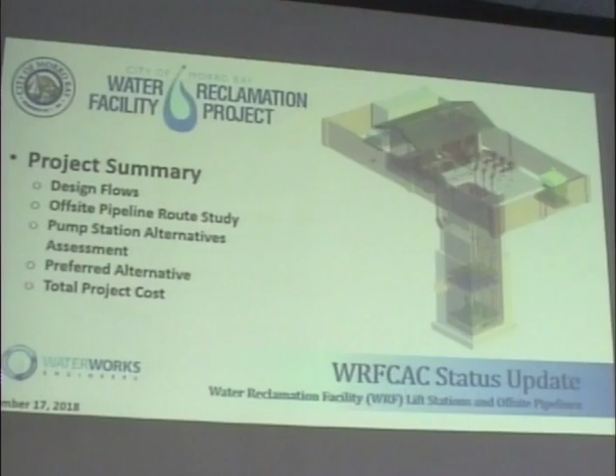So the city's been working with Waterworks Engineers since November of 2017 as the designer for the lift stations and pipelines that will be used to connect the existing wastewater treatment plant to the new water reclamation facility out at South Bay Boulevard. The draft conceptual design report is Waterworks' first major deliverable, and we'll have subsequent design documents, the 60, 90, and 100% phases, to bring to WRF-CAC and to council as well.

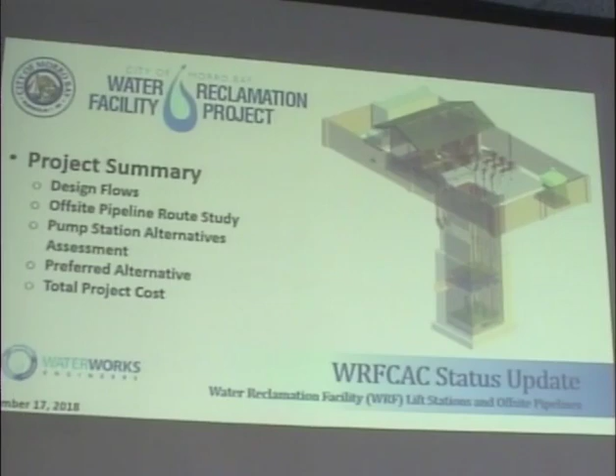So the concept design report is really doing a couple of main things for this component of the WRF program. One is to look at the different alignments and different ways that we can run pipes between the existing facility and the new site. The other thing that's critical is looking at the pumping and the orientation and the number of lift stations that we potentially use in order to convey that wastewater from the existing site up to the new site. And then the third thing is really to identify exactly where those pump stations would be located.

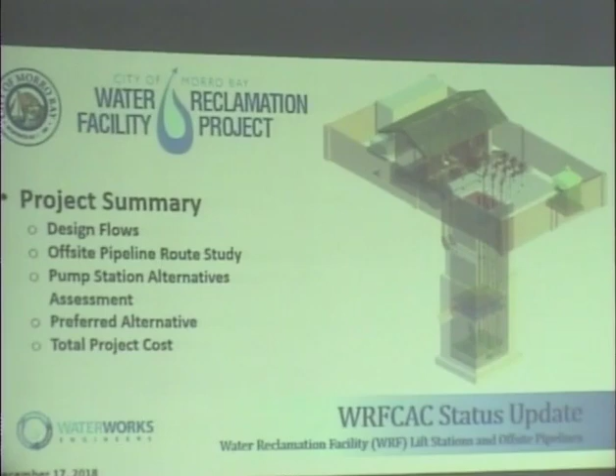So we have with us tonight several engineers from Waterworks Engineers, and Mike Fisher is going to be giving a presentation that's going to go over these different topics. So I'll pass it to Mike. Thank you, Eric. Thank you, members, for the opportunity to present.

We've been working on this project for approximately 12 months, and through that time frame, we've developed a wide range of alternatives, and the reason for that was to make sure that we've taken into account the various constraints, both cost and non-cost, related to the potential options for the pipeline alignment as well as the pumping options. And we wanted to bring this to you at this phase so that any comments, concerns, questions that you have from the preliminary assessment get properly depicted in the final version of the concept design report. That was the reason for bringing a preliminary findings assessment first, rather than the concept design report, to be able to have some interaction with individuals regarding the results.

We're going to hit on the design flows that were used. We're going to hit on the route study for the pipeline alternatives, as well as the pump station alternatives throughout the presentation. And subsequent to that, we'll look at what the preferred alternative is as we see it now, taking into account all those comparable constraints and cost related items. And then we look at what the current total project cost is going to be. And so the first item you'll see in the presentation is kind of a 4-panel overview of the entire process.

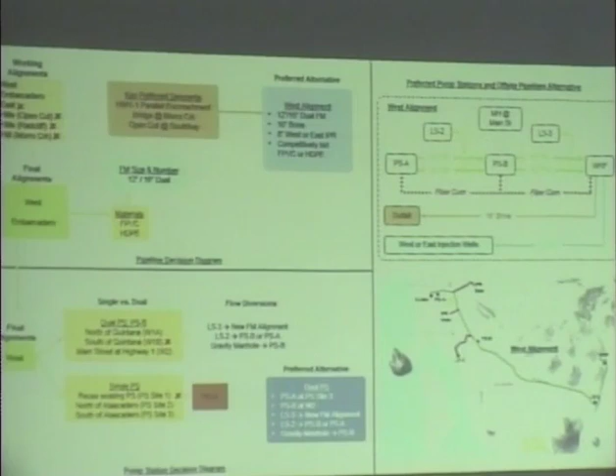And in the upper left corner, you'll see a representation of the pipeline decision diagram, basically a process by which we looked at working alignments and then fatal flawed certain alignments due to cost and non-cost constraints, and then took those final alignments, which happened to be the West and Embarcadero, and I will go through how we got to that point. And we took those 2 final alignments into the pump station analysis. And I'll explain throughout this presentation why we got to that point with various slides.

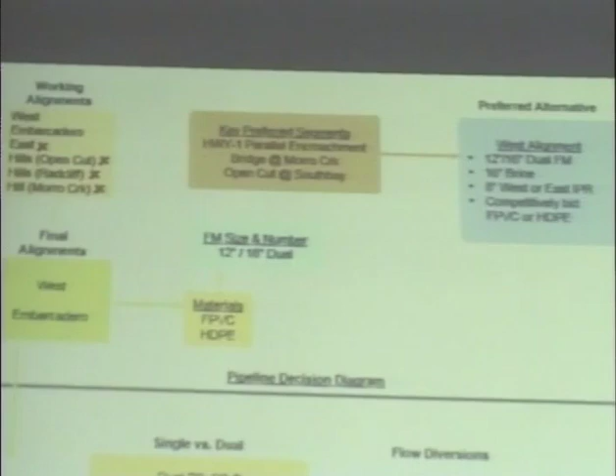But we wanted to give you this as an overview of the process so that, as we go through the presentation, if you want to look back at the flow chart of decision matrices that we went through, you can jump back to that. But at the top left there, you'll see the working alignments, and an analysis of those led to the final alignments, which were then taken through a process to identify some key preferred segments that we had to make sure we addressed, and we resulted in a preferred alternative.

Whereas on the pump station side, once we took the West and Embarcadero alignment, we looked at 2 different alternatives: a single pump station that took all of the flow all the way from the current wastewater facility up to the new WRF location, as well as a dual option. And I'll get into why a dual option does provide some benefits.

And then on the right-hand side of this flow chart, for you to have available to refer back to as we go through the presentation, is the process mechanical diagram of the preferred alternative on the upper right. And in the bottom right, you'll see the preferred alignment as it stands with us at this point in the process.

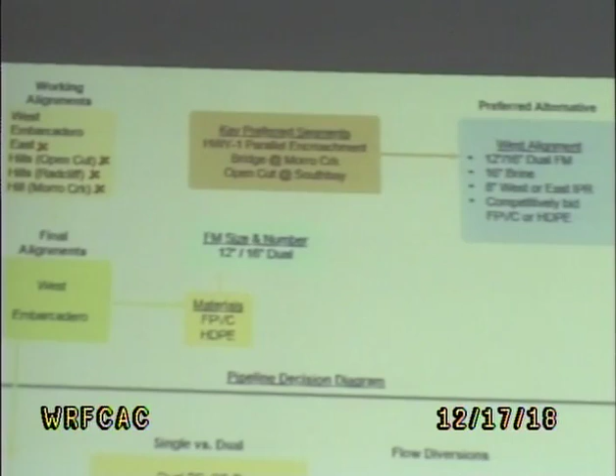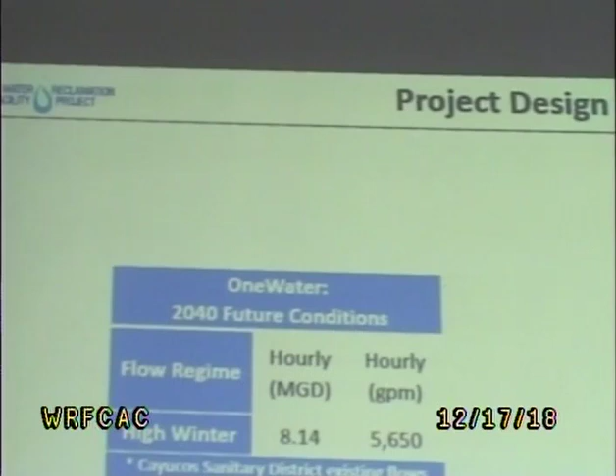The way that we went through this process was we first looked at the rough design constraints, and the 2 biggest items were what's the design flow for the pump station, and secondarily what we'll call total pumping hydraulics. And those 2 design conditions affect the leading alignment alternatives and pump analysis.

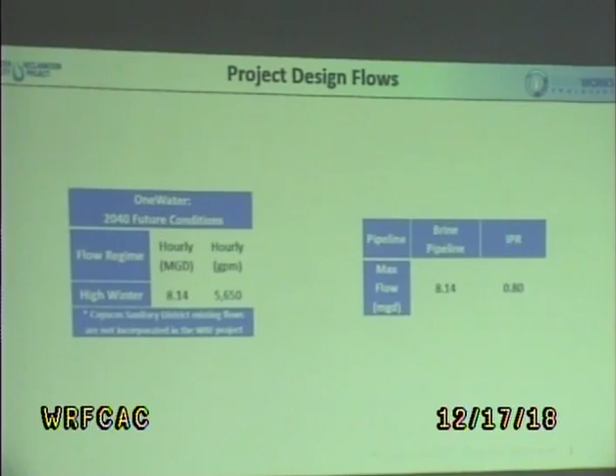So we just wanted to make sure it was understood that the city has been going through a really advanced process by developing their One Water master planning process, and we integrated considerably with Carollo during that process to make sure that we were bringing to you a design that matched with their build-out conditions.

And so you'll see that the pump station is built with a firm capacity of 8.14 million gallons on an hourly peaking basis, and then the brine line to bring flow back from the WRF in the wet conditions when you may not be able to use the indirect potable reuse facilities. You bring brine back down that line.

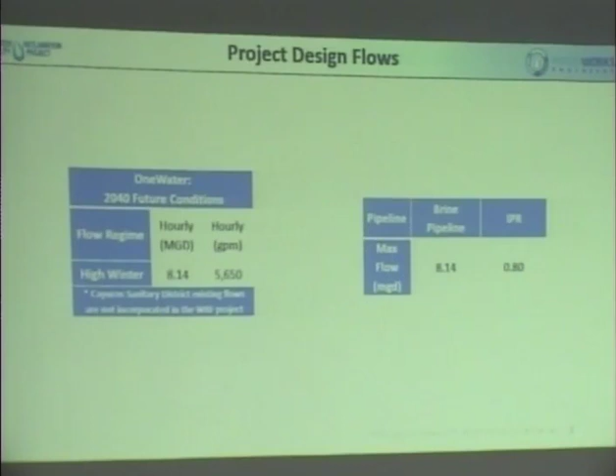And what that results in is basically 4 different facility types that we are building or looking at in our alternatives alignment. The key one being the force main that takes water up the hill. Then we've got the brine line that brings the treated water down the hill for ocean discharge. We've got the indirect potable reuse line, which is intended to go to the recharge facilities. And then we also have a communications conduit. So when we were looking at alignment alternatives, we were looking at space available for all of those pipes.

One of the things you'll notice is in the sewer force mains, I talked about 2 major constraints that led to the initial assessment. One was, what is the flow? And that leads into hydraulics. And one of the things we saw was, given the range of flow, that 8.14 million gallons on the previous slide represented the max hourly pumping conditions that the treatment system produces. That condition only happens a very small amount of time. Most of the time when you're operating this plant, it's under 1 million gallons, and in the middle of the night, it's as low as 0.3 million gallons per day.

Because of that, we believe that a dual force main option provides the best hydraulic conditions, meaning that we don't want to allow low velocities at very low flows in a large diameter single pipeline; that can significantly affect operations. And so we looked at a dual pumps, dual force main condition: a 12-inch force main for typical operations, a 16-inch force main as flows increase, and then at the maximum capacity conditions, you'd run both force mains simultaneously.

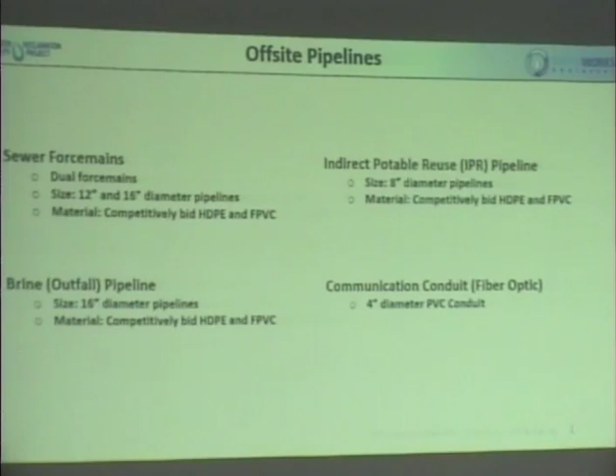And that's why we looked at the dual force main option, and that's what you'll see as we move forward. The offsite pipeline route study, kind of an overview of how we produced this process. We developed working alignments, and our working alignments included not only the ones that had previously been discussed, but we also, as you'll see in the next couple of slides, looked at a wider range of alignments, thinking that we might be able to find one that was outside of what had been discussed previously, making every attempt to identify an option that minimizes the non-cost impacts associated with this project, as well as trying to stay within the available cost matrix of the project.

So what we did is we took that wide range of working alignments, we identified the major criteria and constraints associated with those, and then certain alignments were fatal flawed based on those major constraints. I'm going to walk you through each of those, but I want to give you how the process worked. Once certain alignments were fatal flawed, we took the final alignments, which are the West and Embarcadero alignments, through a detailed cost assessment and a non-cost considerations assessment. I've got a table in a few slides where I can walk you through each of those constraints. From that we ended up with the preferred alignment alternative.

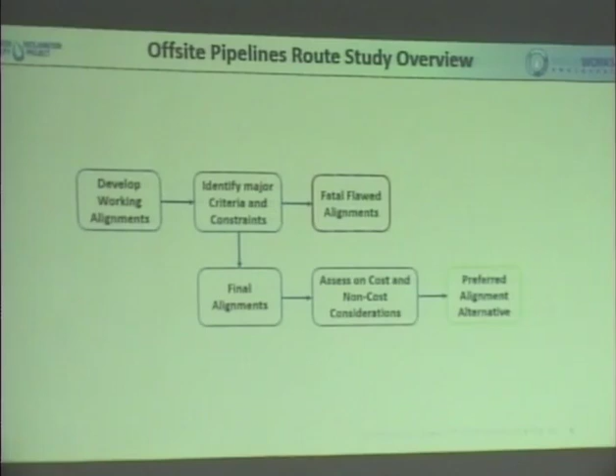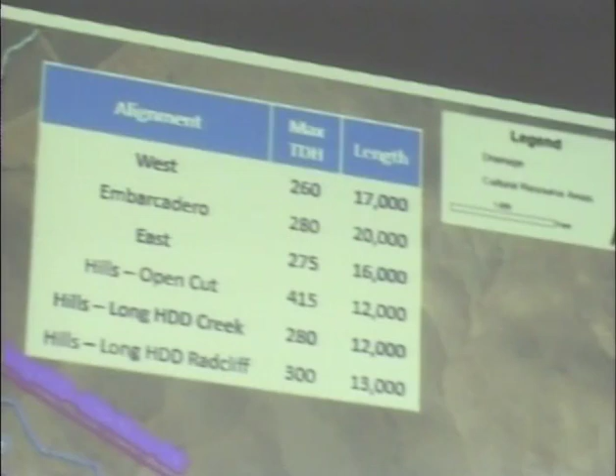So this figure represents the wide range of alternatives that we looked at for the project. You'll see we have the original west alignment that was discussed, which is along the bike path, east along Atascadero, along the bike path until you get onto Quintana Road, up Quintana Road. This is one variation from what you may have seen in the past: instead of crossing with trenchless construction across Highway 1, we drop all the way down onto South Bay Boulevard and have looked with Caltrans at going under the South Bay Boulevard Bridge so that we don't need to do a high-cost trenchless construction under Highway 1. So that is the west alignment.

We then also looked at several alignments on the east side. Several alignments tried to minimize the total length of the project as much as we could, and those are the purple alignments, the long horizontal directional drilling alignments, as well as an open cut alignment. Basically, these are the shortest paths from point A to point B, thinking that the shortest possible alignment would minimize cost. In the next slide, I'll show you why those don't pan out. We also looked at an east alignment that got under Highway 1 at Atascadero and then followed Main Street up into the Radcliff neighborhood and then along the Highway 1 right-of-way.

And what we found, I guess I'll jump back. We also added one additional alignment, the Embarcadero alignment, which, instead of going east out of the treatment plant facility and the eventual offsite lift station, went west along Embarcadero, crossed Morro Creek, along Embarcadero, and then up and joined the west alignment just past the traffic circle. That is the longest alignment, but it had some potential at the initial discussion for minimizing some of the impacts on Quintana Road, which we knew was something we wanted to try to identify through the process.

It's one of the several trenchless technologies that are available for pipeline construction. If you'll remember, when you look at these alignments, we looked at an option because from a hydraulic standpoint, you're at a low point here, or I shouldn't say a low point. You're at an elevation here similar to where the connection at the WRF needs to be, and at an elevation here similar to where the WRF connection needs to be. But the highest point along this alignment is close to 400 feet.

And because of that, you'll see that we knew that the open cut across this high point would have required us to be at 415 feet of total dynamic head, basically the hill we have to pump over, and that would have made this infeasible to very abnormal for a pumping condition. And so remember, we're not pumping raw water or clear water here. We're pumping sewage water, which can significantly be impacted by high head conditions, large flow high head conditions. So we knew that the hill's open cut alignment would fail from that hydraulic standpoint.

So we looked at one that could potentially get you that same distance, but in a way that didn't have such a high head to pump over, high elevation to pump over. But this length of horizontal directional drilling, while it is feasible, you would be the only project in the United States right now that's done a horizontal directional drilling of this length. And add on to that, the depths of your pipeline along the alignment would be close to 220 feet deep. So we were looking to try to find a way to minimize the length of the pipeline, and this one just failed from a constructability standpoint. And that's why we fatal flawed the open cut alignment based on hydraulics, and we fatal flawed the long horizontal directional drilling based on the constructability of those projects. So the shortest alignment is out.

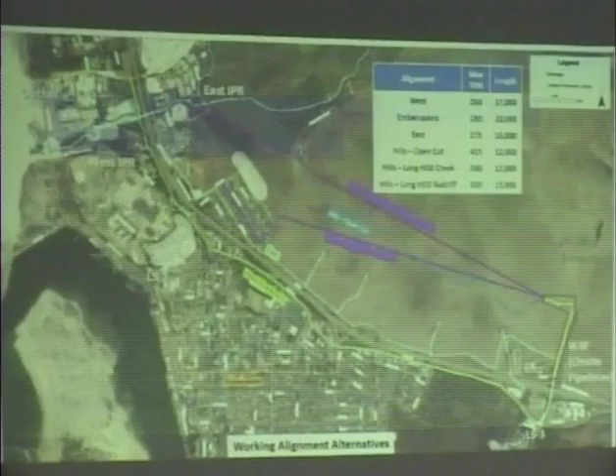So you will see a discussion of an east and west alternative, and the reason I want to bring that up real quickly is when we first looked at the east alignment along Main Street here, we found another concern, and that is, as you're well aware, there's the bridge on Main Street that crosses Morro Creek. That's on piles.

So the ability to cross that with another horizontal directional drill, in other words, go past the edges of the piles that currently hold up the infrastructure on either end. We're in a little bit of soft soils through there, so a lot of your infrastructure in that area requires deep foundations, basically to get down to solid ground to hold the bridge in place. Those piles are so close to the right-of-way that if you were to try to drill past them, you could impact their stability. So this part of the east alignment was fatal flawed on that issue as well.

So we looked at the hybrid condition, which would be go on the west, down to Main Street, cross under Main Street, and go along the east alignment. But then when you add in the hydraulics issue related to the inability to open cut this east alignment, and then adding in the environmental scheduling risks associated with HDD, not to mention the potential cost impacts of 4 different HDD crossings of that alignment, we got to a point where the east alignment was fatal flawed.

And so I look forward when we get to the question session to going into this further if you have additional assessment, but I'm trying to take you through as much of the detail as I can now so that it starts to maybe pique and identify questions you may have. When you look at the west and Embarcadero, you can see that there's several benefits to the west alignment. There's several benefits to the Embarcadero alignment. All of them we fully recognize have some pretty significant traffic impacts.

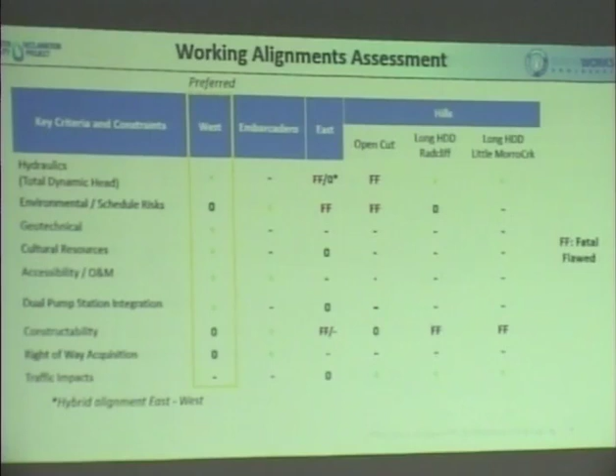And so, we have identified in the concept design report our mitigation to those conditions, and we look forward to hearing questions regarding those. But we then took these two, the west and the Embarcadero alignment, to the next phase, which was a detailed cost estimate of both alternatives, as well as a non-cost assessment of those alternatives. And what really drives the bottom line here is you're looking at about a $13.5 million cost for the force mains and brine line on the west, and about 15.1 on the Embarcadero side.

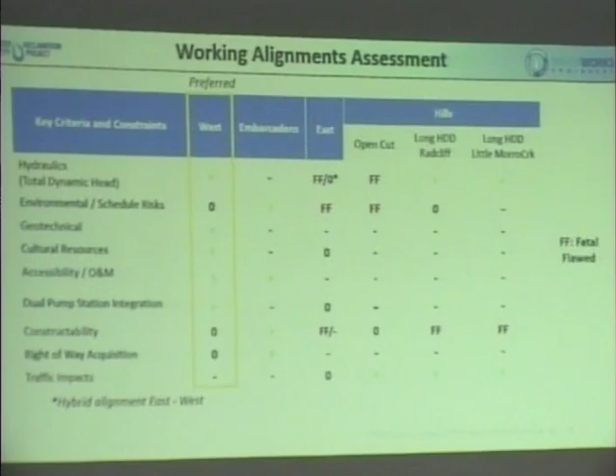And the key items there are property procurement, right-of-way procurement. On the Embarcadero it is more complex and more costly. And secondarily, just going back to give you a basis, the west alignment is about 17,000 feet in length. The Embarcadero alignment is 20,000 feet in length. So that additional length costs money. It's more pipe in the ground.

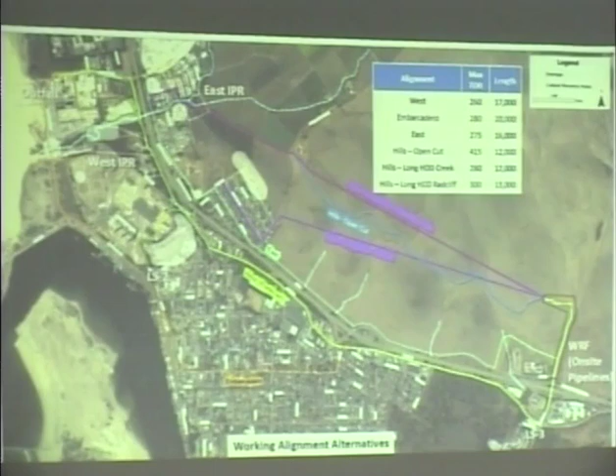I'd like to add into that some of the downsides associated with the Embarcadero alignment as you look at your indirect potable reuse alignments. You've got 2 locations potentially where the indirect potable reuse will be implemented, the west and the east, and you can see that there's an additional cost in either of those cases if you use the Embarcadero alignment versus the west alignment. The impacts on the communication conduit are relatively minimal, but they still are part of the discussion.

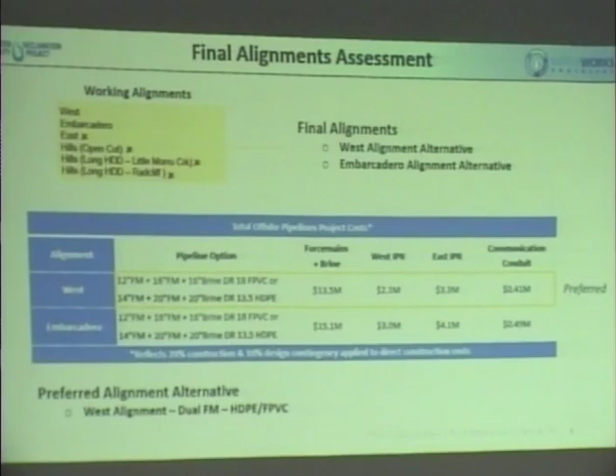So with this as our starting point, at the initial blush, we knew the west alignment was going to be a likely alternative. So we took the west and parts of the Embarcadero when we did the pump station analysis into the next phase, which was analyzing the pump stations and what are the hydraulic conditions that impact the size of the pump station, and then the layout of the pump station, a single versus dual pump station.

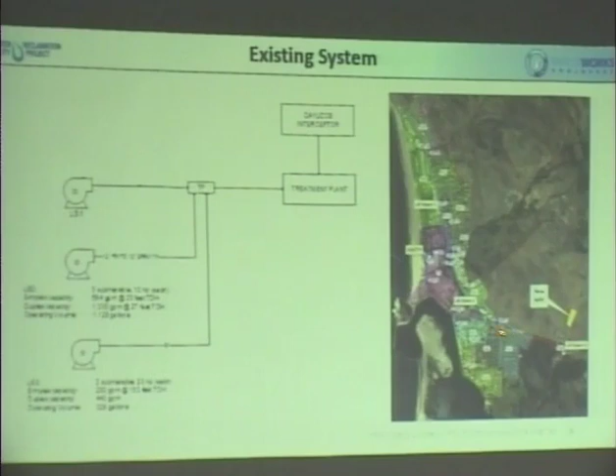So just a reminder real quick, I wanted to make everybody aware of the existing system. I'm sure you're all very familiar with this. This is the treatment plant, which is on Atascadero. Lift station 1 is pumped through the system to the treatment plant. Lift station 2, which is along the Embarcadero, pumps directly to the treatment plant. And lift station 3, which is effectively at the corner of Quintana and South Bay, pumps up the hill and then down the Quintana gravity line to the plant.

So the single pump station alternative was take all of the flows at the plant, pump them up the hill. That was effectively the alternative. That's very similar to what you've seen on previous assessments. It was the single WRF lift station alternative. Some of the things we ran into with this alternative, the variation in pumping conditions, basically almost 97% of the time, you're pumping between 0.3 and 2 MGD of flow. So basically 97% of the time your treatment plant's running in an under 2 MGD condition.

When you get into those rain events, you start to go above that. In the end, that 8.14 million gallon design flow is really only in high flow, high rain conditions. So that's effectively 0.1% of your time. Basically, 8 hours of the year, you'd be flowing 8.14 million gallons.

However, because of that, you create a pumping condition for your pump station that is a very wide array of operating conditions. And so you'll see when we talk about the pump station that completes that need, it has a lot of infrastructure that only gets used for a very short period of time. So I'll talk about that in a little bit more detail here in a moment.

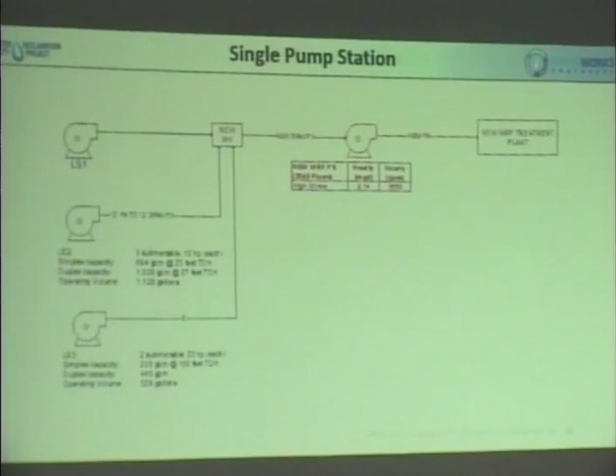So what we looked at was, what if we only took basically the north side of town through a new lift station, and then tried to maximize the use of existing infrastructure and create a second pump station, where lift station 2 pumps to a second pump station that's outside of the storm and inundation zone along the beachfront, which also allowed us to do lift station 3 directly into the force main.

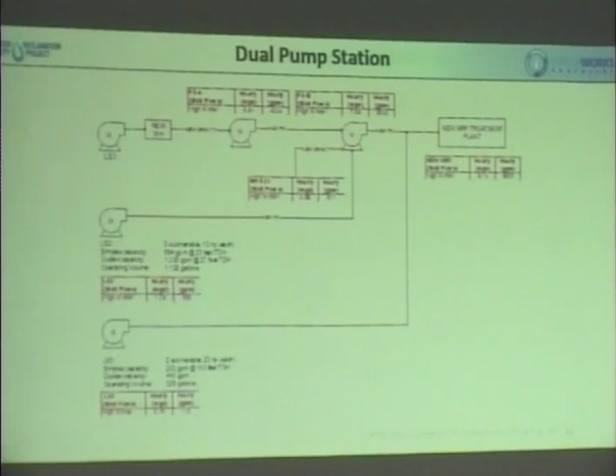If we select the west alignment, lift station 3 can pump directly into the west or the Embarcadero alignment. Pump station 3 can go directly into that force main so that you don't have to double pump. So this dual option, we took both the single and the dual to the next phase of assessment and started looking at the size that each of these would be.

So basically, this is lift station 1. You're looking at a 6 large pump condition, and I'll get into the horsepowers of these in a moment just to give you a feel for how big they are. But 6 wet weather pumps and 2 dry weather pumps. That's a significant amount of infrastructure.

It also requires a much bigger wet well if you do it in that area, and that's why you'll see a 31-foot deep wet well, and just for approximation, this is about 70 feet long by 30 foot wide. That is the structure. You can also see that the footprint of the structure is significantly more, 130 foot by 80 foot. So that represents kind of the size of the station if it was a single station.

The dual station options have a much smaller footprint. The depth at the treatment plant would still be deep because that's driven by your existing gravity lines that are in place now. So you still have to have it at a relatively similar depth.

But one thing that's key to consider between the two is the single lift station will require almost 60 some type of either drilled displacement columns or rock stone columns to hold that station up. You've got soft materials in that area, so we'd have to go down another 30 feet worth of foundation preparation to put that in place, which you're probably very familiar with. A lot of your structures in that area have to do that in any case.

But you can see that having 60 of those to install versus only 9 of them to install for a smaller 10 by 10 wet well, the dual lift station option at pump station. We referred to them as PSA and PSB when we did a dual station. So PSA would be at the same location as the single station. PSB would be, I'll get into the location of that, but basically at the corner of Quintana and Main. So I'll take you through that in a moment.

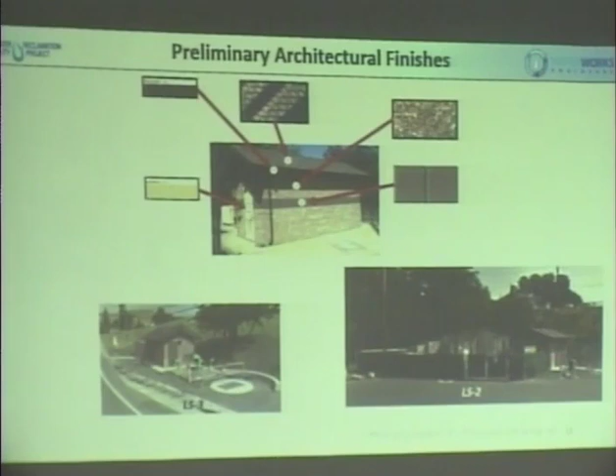This is a view of lift station 3 at the corner of South Bay and Quintana. This is a look into the parking lot where lift station 2 is, just down the hill from the Veterans Hall. This layout of what the building looked like is very similar to what we can do with the dual pump station option. It kind of reduces the visual impact. If we do this larger building, the infrastructure impacts of the single station will be more significant. But generally, the 2-station option will look and operate very similar to what your staff is already utilizing.

So to kind of summarize those options, the single station has a much larger footprint. It basically has 2 60 horsepower pumps that are running for the majority of the time. When you get into wet weather, to meet the high pumping head requirements, combined with all of your flow going to that location, it requires 6 250 horsepower pumps to make that work.

When you look at a dual option, three 60 horsepower pumps at PSA, which is the same as the single station, and basically three 250 horsepower pumps at the second station, you can see you just reduced that down. Three entire 250 horsepower pumps are eliminated from the need if you go with the dual pump station option. So that was one of the benefits of the dual option.

Under 99.5% of the time of flows, you'll have 5 to potentially 6 of your 250 horsepower pumps not operating. They're there for wet weather and wet weather only. It's a lot of investment in infrastructure that gets very little use, but yet still requires the same level of maintenance that you would have on the smaller pumps.

Under the dual pump station option, this is a typical operation. Both stations are running all the time. It's very similar to your existing stations. So from an operation standpoint for staff, it's very similar to what they're operating now.

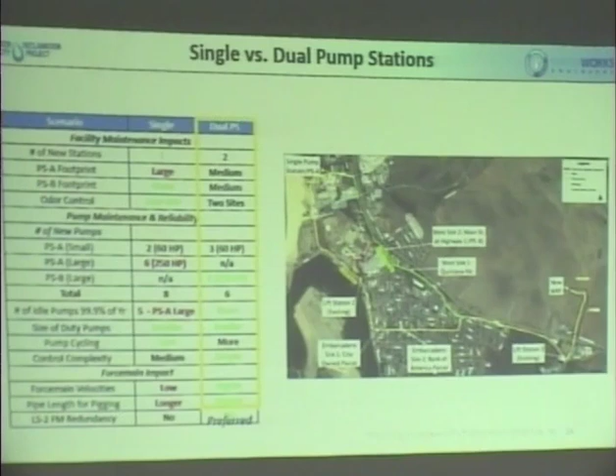There's a second portion of this, the benefits of collecting a portion of the system by gravity. The pump station B location that was selected allows you to collect portions of the gravity system directly into that pump station, so you're not having to take it all the way to the single pump station location. So I'll get into that a little bit here.

So the pump station A configuration and location, this applies to if we would have looked at a single station also. But we labeled it as this, single pump station versus the pump station A option. So there were 3 potential sites for that. There was a reuse we wanted to look at of the existing pump station, trying to utilize existing infrastructure that you have. How could you implement that existing influent pump station that's at the treatment plant and reuse that as the final pump station for the facility.

There were some downsides to that, kind of how it impacted the future use of that property. The construction and phasing of utilizing that existing infrastructure was very difficult. And then there's some other items there that basically identified this as a non-preferred option.

We then looked at the 2 sites that were presented for us to analyze, basically one on the north side of Atascadero and one on the south side of Atascadero, basically in the place of an existing Rex building that's there now. And what we found was potentially a reduction in permit requirements for the Pump Station 3 site, which was basically already on your property, already being utilized for utility infrastructure, versus if you go to the north side of Atascadero, that's a much more visually impacting facility.

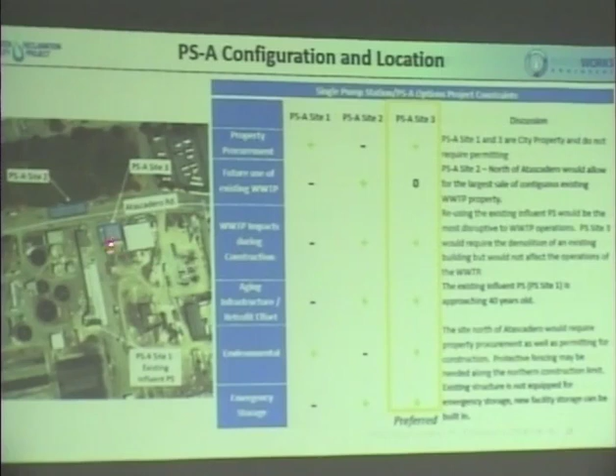Basically, as you're well aware of the way in which Atascadero looks on that north side, just south of the high school. So you can see here those reasons are identified for selecting the existing water facility site as where we would recommend putting pump station A or the single pump station.

When we look at the pump station B configuration, we looked at several locations, and the locations of these are based on hydraulics. To maximize the benefits of a dual pump station and minimize the amount of pumping infrastructure that you need, we looked basically at elevations that were very similar to what produced that. And those elevations are basically around the intersection of Quintana and Main Street.

These 2 are slightly farther south up Quintana. And we found that both of those were not as good from an elevation standpoint. They required property procurement. And in one case, on this side, you get very, very close to the drainage that runs behind those facilities. So the 2, W1A and W1B, that are farther up Quintana were eliminated, and we identified Pump Station B as the existing city parcel that's at the corner of Main Street and the Highway 1 on-ramp. And that's an existing parcel that the city owns.

There are lots of items we could do to create a good visual condition for that site, but it does present a location for the pump station that would benefit the operations of the system.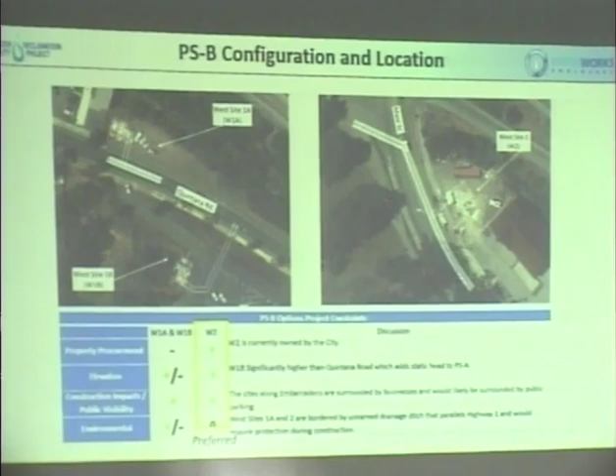So we then did a cost analysis, and on first blush, how can a single station be that much more expensive than a dual pump station? That was something that we even looked at several times to make sure we weren't missing something.

But the reality is that depth of that structure, the single large station at the location of the current plant, that amount of concrete, that depth, that foundation improvements, when you add all of those up, you get a significantly more costly construction project for the single station, as I showed in the previous slide with the size of that facility. The dual station, because there's a smaller wet well infrastructure, less number of pumps, it results in a less costly construction layout for that dual station option.

Also included here, one of the things we wanted to make sure we looked at was operational costs. You're now going to operate 2 pump stations instead of 1. So operationally, how does that work out? From an O&M and replacement funding standpoint, on a 20-year net present worth, you actually will spend a more significant amount of potential funding for the single station versus the dual. And you can see that here in the total 20-year net present worth costing of the 2 alternatives.

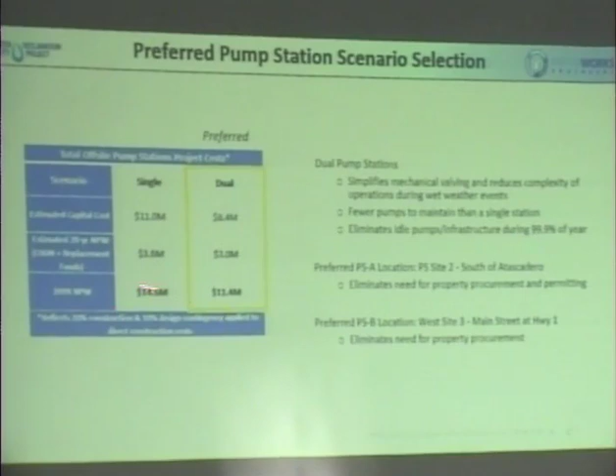So as an overview of what we're bringing to you as our preferred or recommended project is the dual pump station option with pump station A at Site 2, which is on the location of the existing Rex building. Pump station B at the intersection of Main Street and the Highway 1 on-ramp. And the west alignment, which takes you down the bike path, then along Quintana Road, and to South Bay, under South Bay, and to the WRF facility.

And the layout of the cost of those facilities is shown here. The pump station and force main and brine are identified here, the $21.9 million. We've included these other 3 items. The communications conduit cost is well defined at this point. There's still the option of both the west and east IPR alignments, so that'll get further refined during your assessment process of the feasibility of those 2 different sites. But we've costed out what those are likely to be, so you'll have that as one of your pieces of information in that decision making.

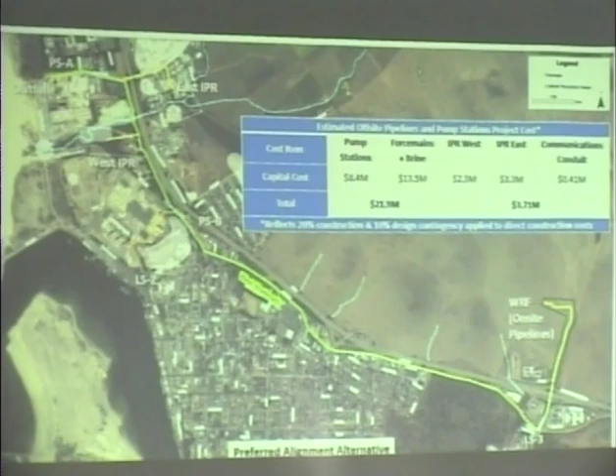So I appreciate the opportunity to present and look forward to hearing questions and comments. Thank you.

Let's see. You want to start with? You're right. Okay. So let's hear from the public first, so we can make sure we can address any of their comments. Thank you, Mike. I'll now open it up for public comment. Anybody in the audience that would like to comment, please come forward, state your name, and we'd like to hear from you.

Thank you. Good afternoon. Happy holidays, everybody. Smiling faces. I'm Carol Truesdale. I've been here since 1995. My question is this. If you're putting a brand new lift station outside of Limos, where did it show up on the EIR report? And then we're going to be spending another $21+ million. I mean, the citizens right now are having difficulty digesting the $41 surcharge. I don't think this is a good idea. Thank you. Thank you, Carol. We will address that afterwards. These costs are included, I believe. But

Welcome. Hi, Marla Jo Sadowski. I'd like the consultant to describe for the people here and at home the difference between cost and non-cost, assessing that. I don't believe that most people really understand what he's talking about there. So if you could do that, that'd be helpful. Also, I'm not a fan of this project.

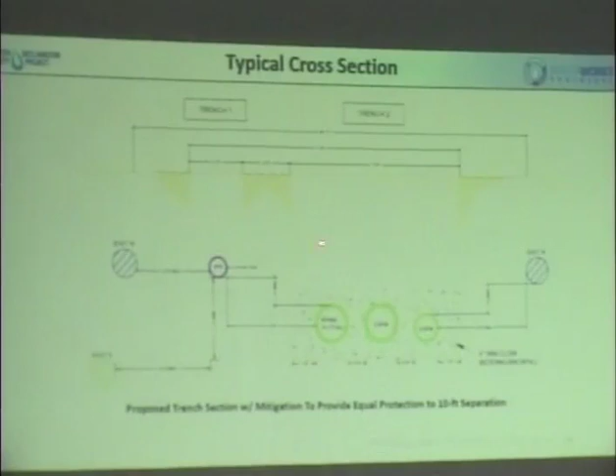This actually goes to two questions that were brought up. And I'm sorry, I forgot your name, sir, but you asked the question about required offset from existing potable water features and the requirement that a sewage force main or a sewage line be a certain distance away from a water line. So this covers two items.

The initial trench that would be constructed would be about 8-foot width, and would have all three, both the brine line and the two force mains, in it. And that would get constructed in one excavation. Separately, as you do a lead trench that would construct the three pipelines related to the brine and force main, you would then come behind it with a secondary trench for the indirect potable reuse line.

That would be at a higher elevation and offset from the sewer lines to meet Division of Drinking Water separation requirements. And we've been in contact with Division of Drinking Water to talk through this trench section, and we're still taking input from them. We've already modified this trench section once based on their input. So the impact area from this edge of the IPR line trench to the far edge of the three-pipe layout is about a 12-foot impact.

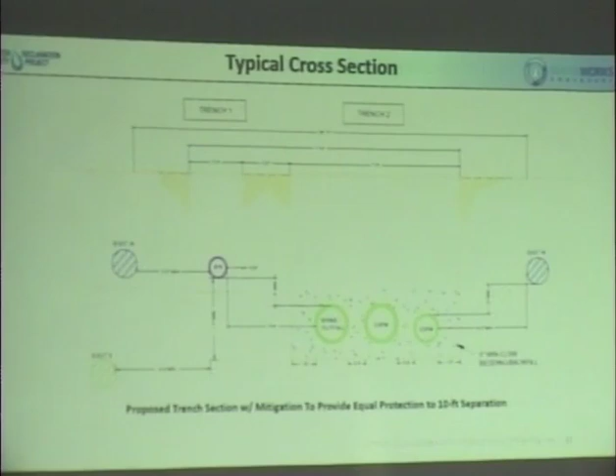How much cover are you going to have over the pipes? It will depend along the alignment. In some cases, we may go as shallow as 30 inches if we need to get over an existing utility, and we'll try to minimize it in the majority of the alignment. Based on what we know about existing utilities, we're very comfortable with the plan view location of existing utilities.

We are going through a process of potholing certain crossings to confirm what depth we would have to be at along the entire alignment, but we anticipate a worst case of 7 foot deep on typical construction. So somewhere between 30 inch and 7 foot deep. 7 feet of cover or 7 feet to the bottom of the trench? It'll be probably closer to 10 feet to the bottom of the trench. Okay. 7 feet of cover, yeah.

And that includes even going in the streets in Quintana Road? Will you be at that depth? There's sections of Quintana we actually think will be at the 30 inch cover, not the 7 feet. But again, not knowing the depths of the crossings at this point, we feel very comfortable that we'll be no deeper than the 10 feet in Quintana, but we don't know how many places will be 30 inches of cover.

Now, getting back to the cultural resources, is there anything that could be found during construction or during the studies that may change your alignment? Like a buried body? Well, I can tell you during construction, we will have to meet all of the mitigation requirements laid out in the EIR, and those mitigation requirements include the potential of an archaeological or cultural resource.

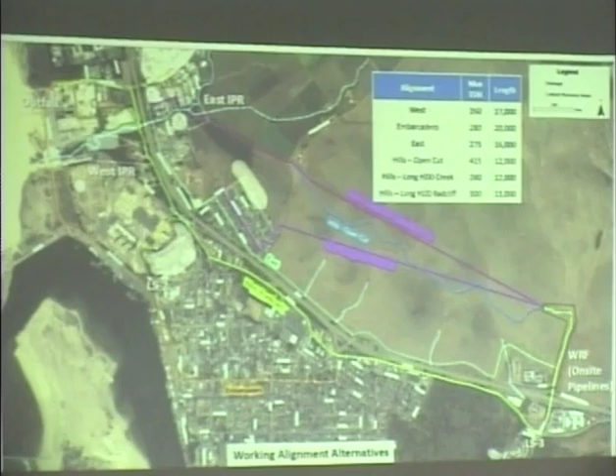And then the last question, if you could bring up the one that shows all the different alternative routes. I think it was the last in this thing. I noticed on the west, as you come down, just before you reach the Cookie Crock shopping center down there, I was wondering if there's an ability to horizontal directionally drill over to the east side. And I realize you brought up a few concerns further east where you have that larger embankment cut on Highway 1 down near South Bay Boulevard.

But it also looked like if you come down further down the road there. This way? Yeah, keep coming down, keep coming, right about there. If you just went straight across the hill up to that corner up there, it seems like you'd be far enough away from that open cut that you wouldn't have the kind of issues you were bringing up. In my own mind, when I first looked at this, it kind of made sense to me. It's going to be a mess on Quintana. I agree with Paul wholeheartedly.

And what I'm trying to do is, it would still impact down near Limos and Pete's Tire and some of those places down there. But I know why you don't want to be on the east side, up around the bridge where Little Morro Creek comes through and all of that. It just made sense at some point to jump the road and not go all the way down Quintana, because you'd be really limiting the amount of stores that would be affected if you could get over to the east after you get just beyond that subdivision, right in there. Yeah, somewhere down in there, cross over, or at least take a look at it and try to get an idea to quantify cost on that.

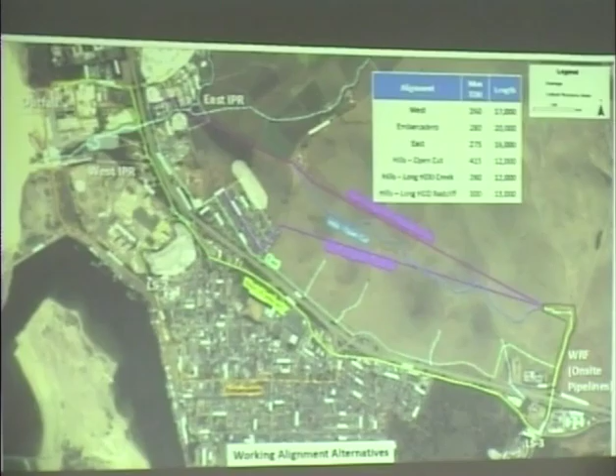You know, I can't tell you how much. I don't know what it costs to do horizontal directional drilling. I'm sure it's very expensive, but it's also very expensive, like Paul brought up, to take down Quintana Road and try to keep the traffic control moving through there. I've seen that in my own life, and that can be a lot of issue. That's my only question, so I'll go ahead and pass it down.

Yeah. This is a question maybe Rob can answer. When would the more detailed traffic plans be developed for this project, and particularly in regards to Quintana? I mean, are we envisioning putting our pipes down the middle of the road, one lane? I think there's this vision that the whole thing's going to be torn up all at once, and we wouldn't have access to any of the facilities that we all rely on. Is night construction in the mix?

Night construction is in the mix. One thing, as Mike pointed out, we have good information on horizontal location. We need better information on the depth of the crossings to finally refine that, so we need to get out there and do some potholing. Other than water utilities, there's also a high-pressure gas main that goes up Quintana that we need to avoid. From what I recall, the middle section of the road is where the clearest spot is.

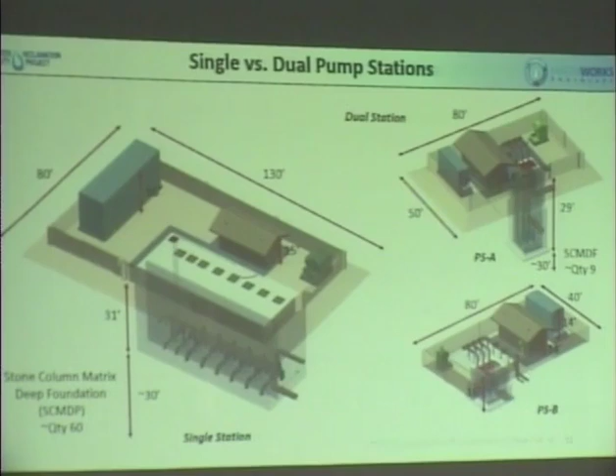In 2009, Carollo Engineering was doing an upgrade on the existing site, and at that time we had a peak of 6+ MGD, peak wet weather. That was with Cayucos. Now, in 2003 and 2004, I worked for the Cayucos Sanitary District and did their flow studies, and the inflow and infiltration rates were about 3 times the average flows, which made it about 1 million gallons. So if you had 6+ wet weather flow with Cayucos, one would assume that your wet weather flow without Cayucos would be in the range of under 6, and you're running around 8.1.

You made a comment. What's your name? Eric. Eric? Yes.

You made a comment regarding inflow and infiltration and how it affects the peak wet weather flows and the reductions, and it didn't really make a lot of sense to me, because it seems to me that what we're designing for is putting a Band-Aid on a problem that we have. Now, it would appear to me that it would be prudent to address our I&I issue immediately. And one of the areas that we know we have problems with is the 60/40 sewer main line, which is infiltrating and exfiltrating sewage in our drinking water aquifer.

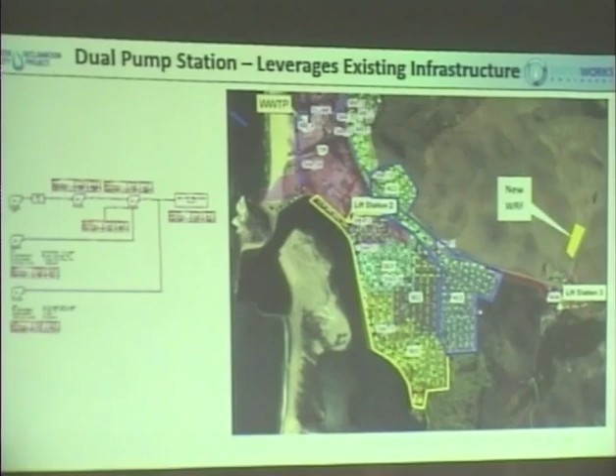Okay. My other comment is there's so much discussion about the flows and the leakage of the pipes. I mean, I hear this over and over. It'd be nice to have it identified as to exactly how these flows were developed and what percentage of that is leakage or whatever, if it really is such a big deal. I don't know if it is. I'm not sure. It's kind of confusing to me.

I think you asked a good question, which was a follow-up to what Mr. Sadowski was asking about the flow questions. So back in 2007, when the original master plan was completed, there was a wet weather flow figure that was presented. Once that was identified, there were some issues with the flow meter at the plant, that it wasn't reading accurately, or it was capping out at a certain flow. And so when the design engineer for that project came on board, Montgomery Watson, they did an updated flow analysis and came up with a higher peak hour flow number.

The benefit that we have at this point in time is the peak hour flow number, the 8.14 MGD, was developed not just by looking at what the influent flows have been historically into the plant, but the model was created for the whole collection system. And in tandem with creating that model and giving you a more accurate representation of what the flows will be, the city also invested in having a third-party V&A come and do an extended dry and wet weather flow analysis that was used to calibrate that model.

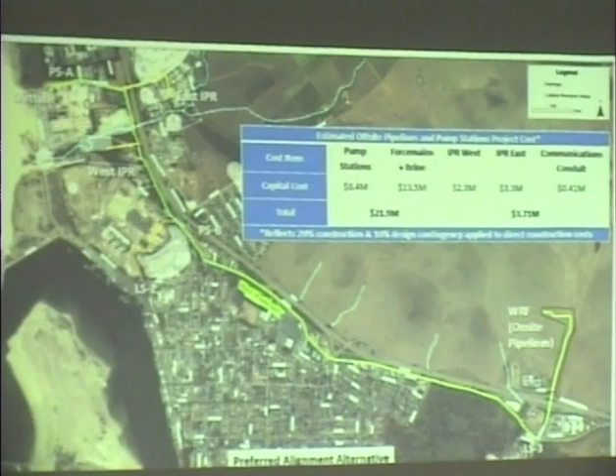Richard, go ahead. Yeah, I just want to make a comment. I looked up my data, and the current plant's peak dry weather was 2.36, and peak wet weather is 6.64 MGD. That's with Cayucos, and according to the 2017 monitoring report for the existing plant, and I quote, the plant's flow did not even approach, much less surpass any of the design limits during 2017. What page is that on? That's a reference I have on the document. May I ask one more question, since Rob's going to do a little more digging?

So the slope stability analysis that was done for the horizontal drilling across the east alignment, that you said that there was a slope stability issue. If you could provide that'd be... Yep, potential. Right, but I'm saying since we're doing a little bit more informative research, if you could provide some sort of

information on if that's... In the concept design report, we'll include a discussion section on why we need to set back from that slope and slope stability issue. Or if you need to set back from that slope. I mean, it's possible that you don't. Or it's possible that you do. So, I mean, if you could just... Yes, go ahead. We will address that in the concept design report specifically.

Thank you, Jesse. And then this paper that was given to us, are these questions that you were addressing? Sorry about that. Go ahead. That was, these are questions that came up that were emailed to the city manager prior to this meeting, asking on design flows and costs for Los Osos. The Los Osos information came from the county public works director. I cannot pronounce Colt's last name, so I'm going to leave it at that.